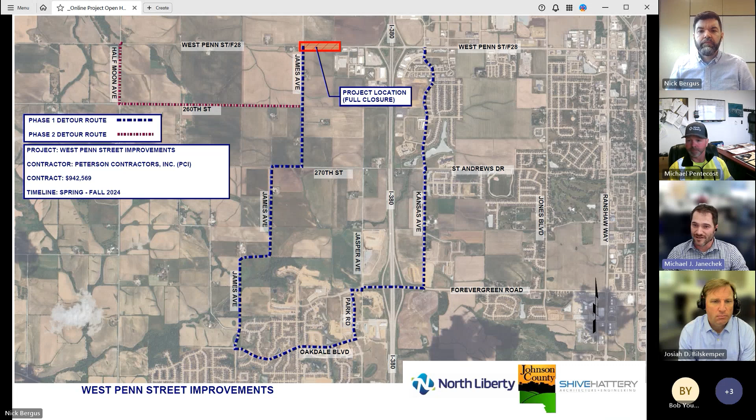Some of the big perks of this project: the chip seal pavement out there has a lot of failing areas, and there's also no shoulders. It's kind of a tight, uncomfortable road. The ditches drop off very steeply right off the sides of the road. So the new road will add in 4-foot paved shoulders and 4-foot earth shoulders.

This is very similar to how North Liberty Road is out by the high school. It will also take those ditch slopes and shallow them out a little bit, bringing it up to speed with current design standards and improving the safety of that road.

Michael, I think it's also important for us to remind folks that there are incentives in this project for the contractor to finish this work early. So there is an incentive of cash, additional payment available to them if they get the work done ahead of schedule.

There's incentives for basically the tail end of summer for this project to be completed, and there's additional incentive for this James Avenue intersection component of the project. So lots of pressure on the contractor to get this one completed as soon as possible.

Now, we did have a couple questions about this project. The first question was, are there plans to move the large steel SIPCO pole that's out there? I believe the answer to that is no, that is an installed pole, and this project works around that really carefully.

The other question was, are there plans to make this intersection a four-way stop with flashing lights or other plans to address vehicle safety concerns? The first thing is we do pull data on this. Our PD doesn't have any record of any vehicle crashes in this intersection. As part of this project, no additional stop signs are planned, it would be a similar situation as today. Again, this intersection is in the county, so that would be more at the county's discretion. But nothing to date, no plans to date.

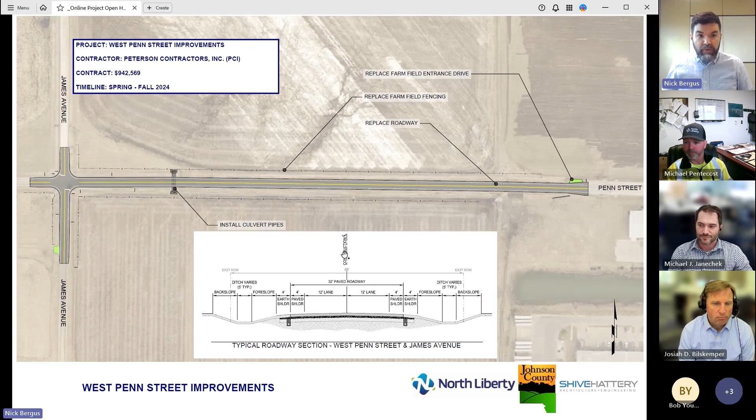I will reserve time at the end to finish up this, but I do want to move on to the next project, unless you have more on this one. Nope. Good. All right, let's move on.

So we're now going to move to our... I'm sorry, we're going to move to our railroad crossing project, which is all the way over here.

Where... this is a pretty straightforward one, obviously inconvenient, but what do we got going on here?

The gist of it is, everybody's aware of the rising up the hill and falling into the giant pothole that's immediately east of the railroad tracks. It's very uncomfortable driving over that. This project replaces that pavement through the area and raises up those storm structures a little bit to minimize that drop as much as possible, and just repairs the damaged pavement in the area.

The other big one that's part of this is the trail along the south side of the road. Currently it's 8 feet, then it necks down to about 6 feet as it crosses the railroad tracks. This will widen that out to 8 foot all the way through, just to put a consistent section through there, along with replacing the sidewalk on the north side to make that a smoother grade transition and a little bit smoother alignment as well.

This project is slated for this summer. Midwest Concrete will be the contractor.

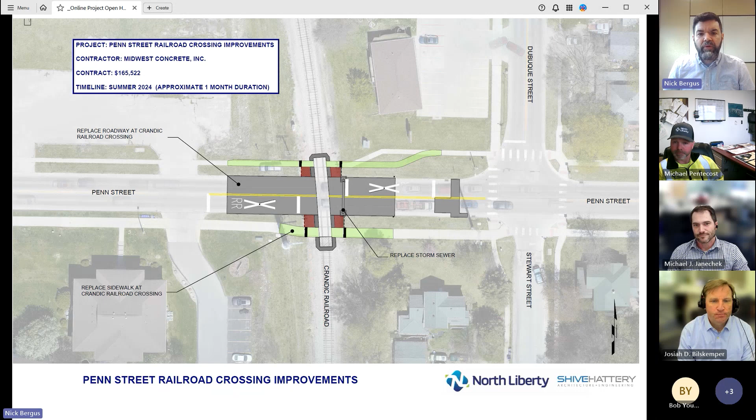All right, we've got a detour on this one. I won't say if it's short or not. It's using Dubuque and Ranshaw to get around that intersection, that crossing. And it's important to note that what's shown on this sheet is the signed detour. All the other side roads around the area will still be open. So this is more so because we have to sign a detour for the project.

But local traffic can still go down to Cherry Street, they can still take Stewart Street, they can take all the other roads around. This is the sort of thing we need because we've got folks coming through North Liberty to go out to the reservoir or the lake with campers and things like that, and they might take this route. We need to get them there, and Cherry Street's a good east-west street that works well.

Michael, can you talk a little bit about how working around railroads is even more complicated than just any other project, with the coordination with the railroad?

Yeah, so in this project, this is on Crandic Railroad. They will be installing one of their precast crossing panels in the railroad tracks that people drive over. An additional one is going to be installed to allow for that trail to widen out through there. In terms of railway coordination, there's additional insurance and safety training and just extra coordination that's necessary, along with derailment protections that Crandic has to install for this work to occur.

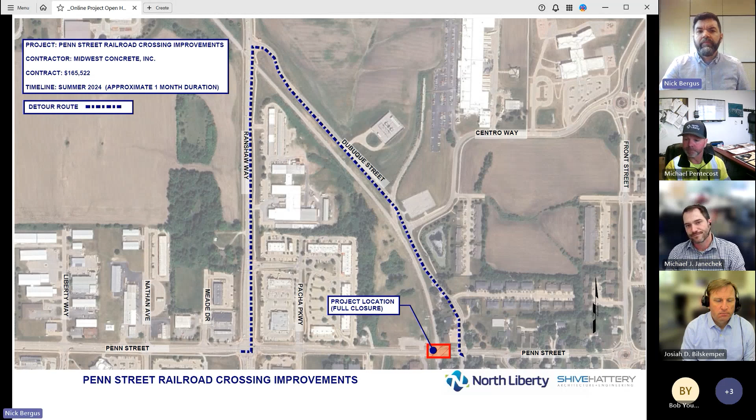Great. Thank you. Let's talk a little bit about these new signal projects, which people have asked about a number of times down here on Forevergreen Road. We're going to talk about the two spots - one at Jones and one at Kansas.

They are one project, but they're in two different intersections. So let's start here with the Jones Boulevard one. This is the one that currently has temporary signals and has had those for a couple of years now. What do we got going on here?

So this one, as Nick just alluded to, this is putting permanent traffic signals at the Jones Boulevard intersection to replace those temporary signals. One of the neat things about this one, we are also adding turn lanes on Jones Boulevard on both sides of the intersection. As we've all experienced driving through town, that intersection starts to back up now during some of the more peak traffic times. So there'll basically be a dedicated left turn lane developed on Jones Boulevard. This also replaces and kind of realigns the sidewalk geometry and crosswalks and gets those all up to be ADA compliant. This will have new pedestrian push buttons, and it'll also restripe through the intersection.

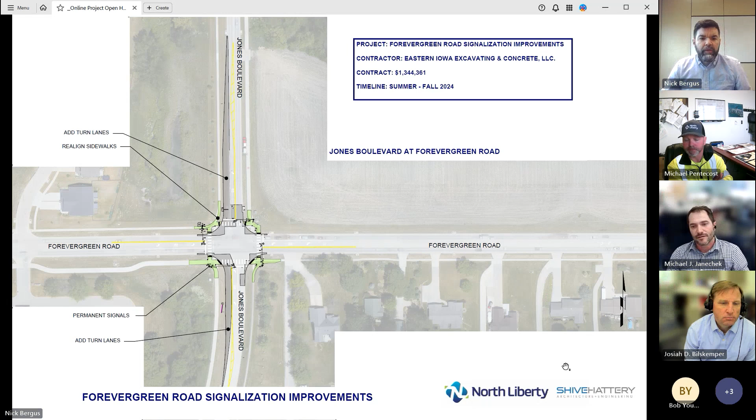Great, let's flip over to the other intersection. This is at Kansas. What's going on here? So this is very similar - placing new sidewalk around the intersection, getting all those crossings ready to go for the future, and making it so pedestrians can safely cross that road. The biggest component of this one, we are putting signals at the Kansas intersection. I know everybody who's driven that, especially coming from Kansas, it's a very uncomfortable intersection to turn either way. So this should help improve the safety there.

But yeah, this one's basically just like the Jones one, only we are not adding turn lanes anywhere. We are restriping through the intersection a little bit. As we previously said, this is part of the Jones intersection project as a whole.

Important things to note: both intersections, traffic will be maintained through the full duration of the project. There'll be some miscellaneous lane closures while some of this work is occurring, and particularly at the Jones intersection, there'll be some narrow lanes and maybe some more uncomfortable pass-through driving situations. So during construction, it'd be recommended to avoid the area if possible. But through thoroughfares will still remain, so everything will still be open to traffic.

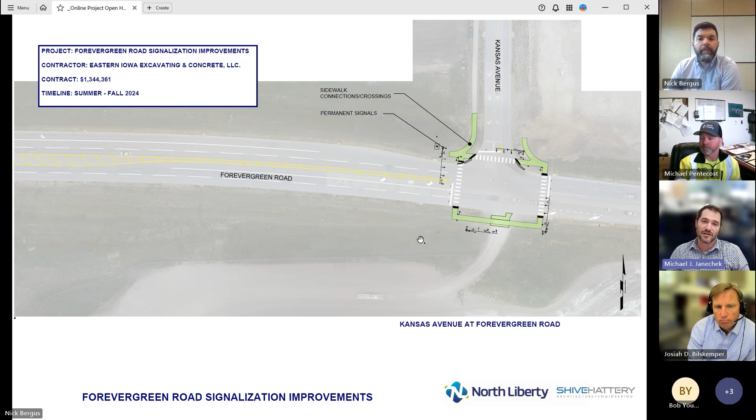Great. All right, one last one we're going to talk about here today before we get to questions, and that's the Fox Run Pond Trail improvements. It's more than just trail improvements, though.

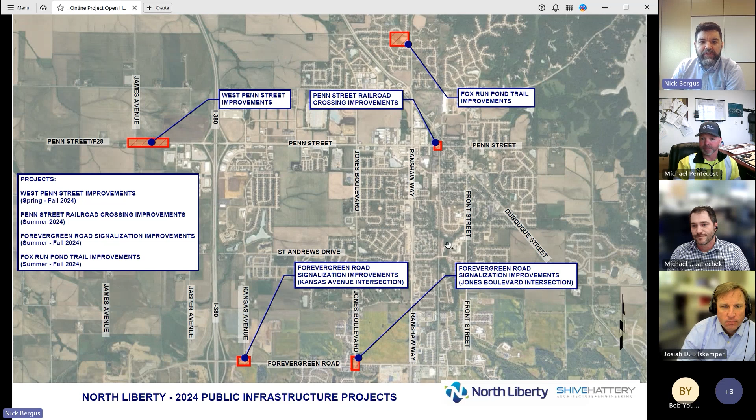So we'll start here. Here's our layout. Josiah, I think you were going to take us through this one, though it's pretty straightforward. Yep. I know Guy Goldsmith, our Parks Director, has been working with neighborhood ambassadors in the neighborhood in this area on this. So what are we doing in this area?

Well, this project's been on the Parks Department's long range plan for a while, and its time has come. So this is going to build a trail. The green line work you see is a new 6-foot wide concrete trail that's going to go around Fox Run Pond and through there. The nice thing is this will connect - there's some existing sidewalk stubs in that neighborhood that stub out into the green space. We're connecting each of those to the trail. It will also connect to the wide sidewalk on Scales Bend and Pheasant Lane.

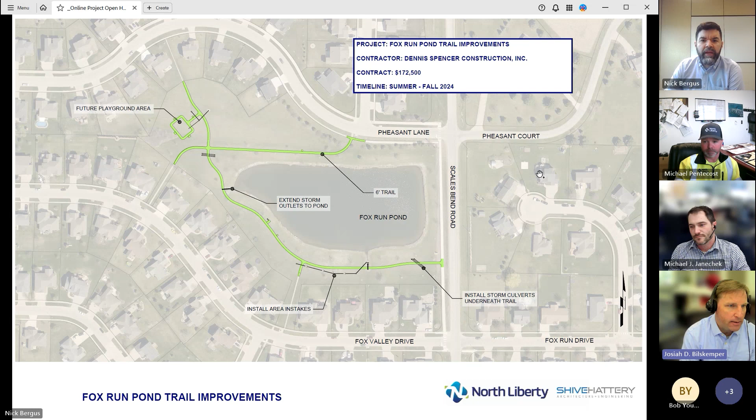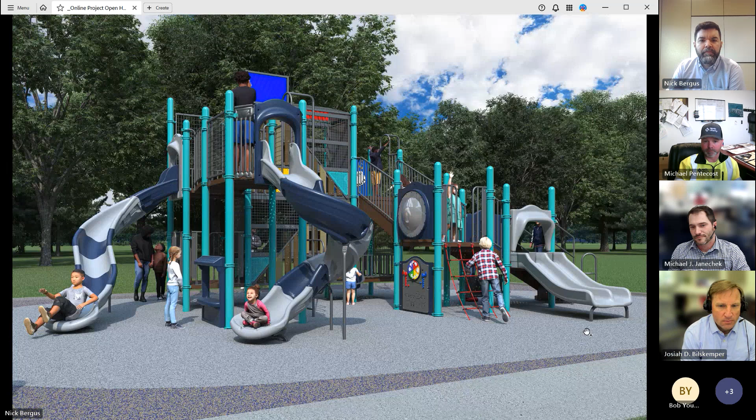And then up there at the top of the screen, there's a note for a future playground area. Right there. So the contractor doing this work and building this trail will build that rectangular green outer boundary, like a concrete boundary, and that's where the Parks Department is going to put in the new playground equipment inside of that. Yeah, we've got some renderings of that. We're not adding huge mature trees around it, but this is the rendering of what will be going in that space. This is a new structure that they'll install. So that outer band you see on some of those images is representative of the concrete walk that the trail contractor will build, and then Guy's crew will do the inside there.

And this is a very similar setup to other parks with that concrete around, and then a poured in place base. We'll also be moving - Guy wanted me to mention that we're moving to poured in place in as many spots as we can. So Penn Meadows Park, that newer playground there, the mulch will come out, and that'll have a poured in place pad here this summer too.

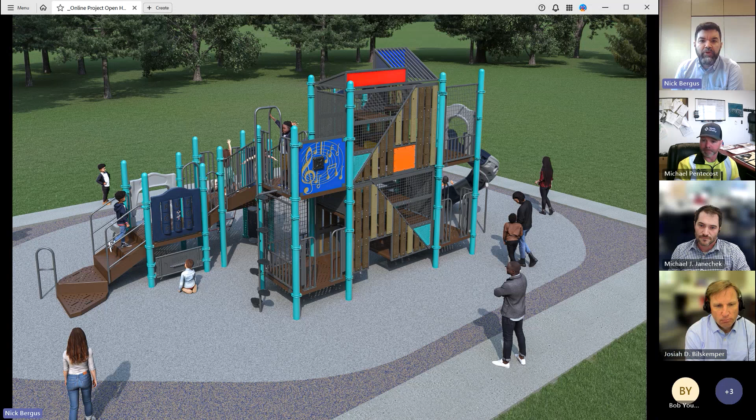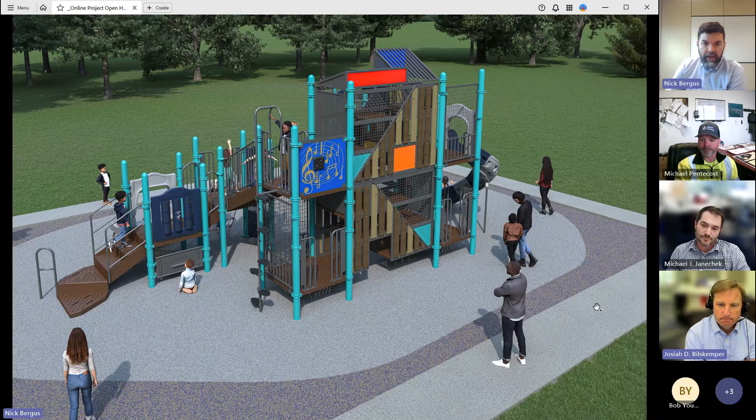Well, that one's pretty straightforward. Anything else you want to touch on here, Josiah? The timing on that one - that would start after school as well for that park project, and they need to be done by September 4th. And there's a little coordination there between the contractor and getting this playground surround done earlier, so Guy's crew has time to come in and get his work done. So, yep, he's hoping to have that installed in August, so it'll be ready by the end of the summer. Correct.